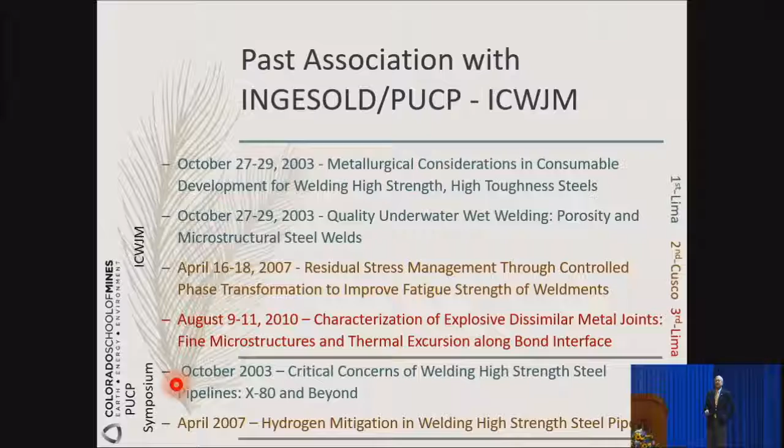I want to briefly talk about my past association with the organization of the International Conference of Welding Joining of Materials. On the right-hand side, the first one was in Lima, the second was in Cusco, the third was in Lima as well - those are 2003, 2007, and 2010. For the first two, there was a symposium to go with each one, so I was fortunate enough to be part of that program.

I want to show you a few pictures of who are the really relevant people that organized this meeting. Here you see Dr. Jorge Merztal, who was there. And in the picture, who else is there? Ernesto Indacochea. And it's international - Dr. Tom North here from University of Toronto.

So from 2010, this one was most festive. You see Professor Carlos Fosca here and Jorge Merztal here. And it was truly international because the Osaka professor Ikeuchi and Wolfgang Tillmann, and then Ernesto here again, and I think that's Carlos from Soldexa. Let's look at the next one here.

American Welding Society actually looks upon this event quite seriously, because one of the former presidents, the Big John - John Bruskotter, was here, and Professor Carlos Fosca is here again, and Jorge Merztal and Ernesto. Then finally, that was in one of the welding shows, and here Professor Rumichi, right there - I won't call you younger.

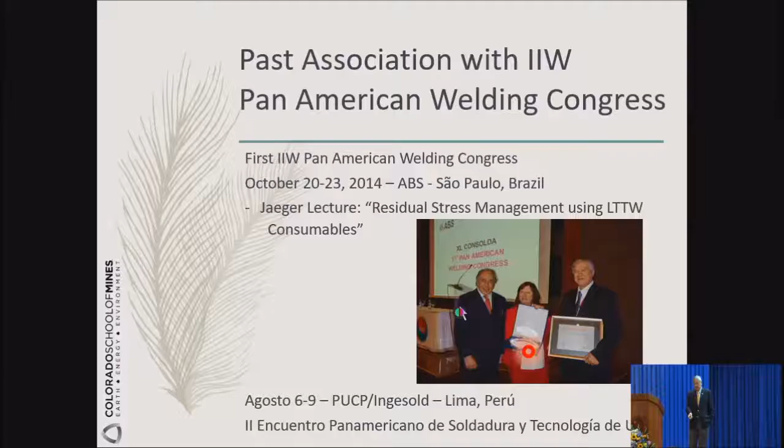Now we can go back to the actual talk for the day. We're going to talk about additive manufacturing, laser-based and electron beam-based. I know that on the program there will be one keynote talking about arc-based 3D printing as well, so we're not going to talk about that.

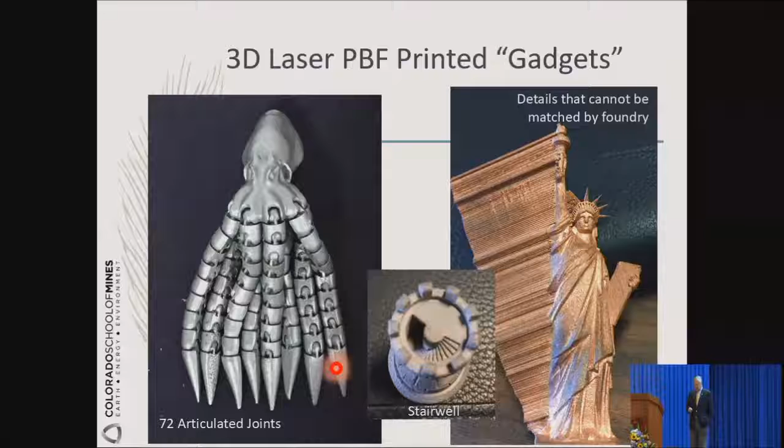If you look here at the surface, the surface condition isn't so great, okay? For each piece, you can see the surface roughness. So one of the shortcomings of 3D printing is going to be the surface - how can you produce a better surface from these 3D printed materials? Now, look at this one here, making it more like an engineering piece of material.

You have here a model engine. Now, I don't think this is an actual working engine, but yet it was printed in one piece with a freely rotating rotor. That is already an accomplishment. So let's get closer to the actual printing.

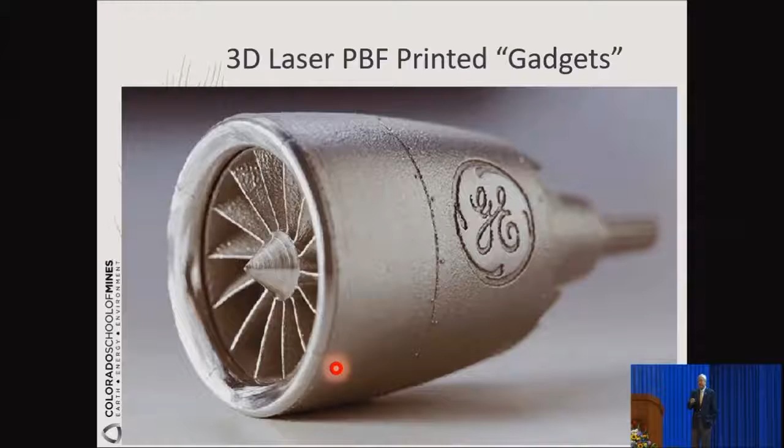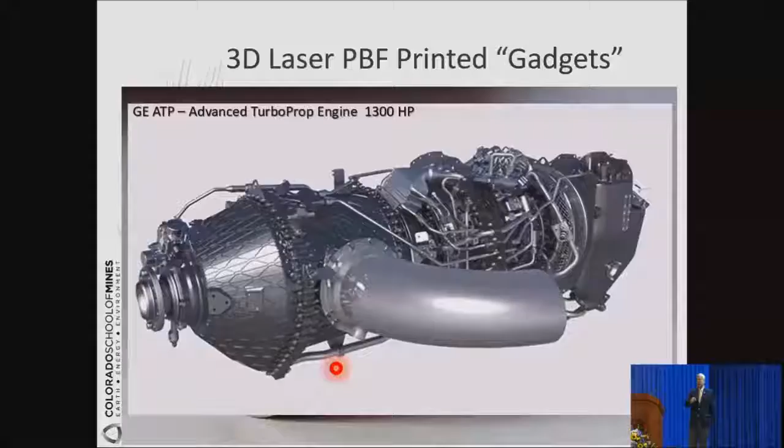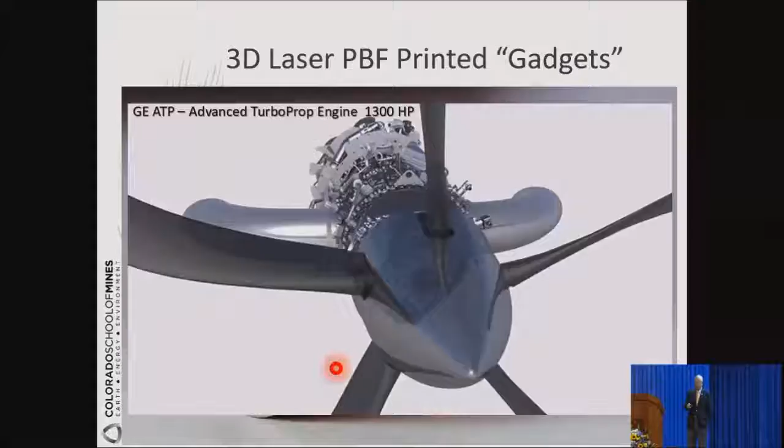GE had announced that they actually printed this piece of machinery. It's an ATP engine, and this supposedly was the first engine that was printed entirely by 3D printing. Sometimes I'm not exactly sure at what stage we are, but they claim they have built one, so let's take their word for it. But I'm going to go back to some more of the engineering components.

Here is a jet fuel nozzle, and this is actually built by 3D printing. If you were going to do this by more conventional manufacturing, this part could be anywhere between 20 to 50 parts brazed together. So just by doing the 3D printing, done by laser powder bed fusion, that is a tremendous saving. And this is a real part that is printed and in use.

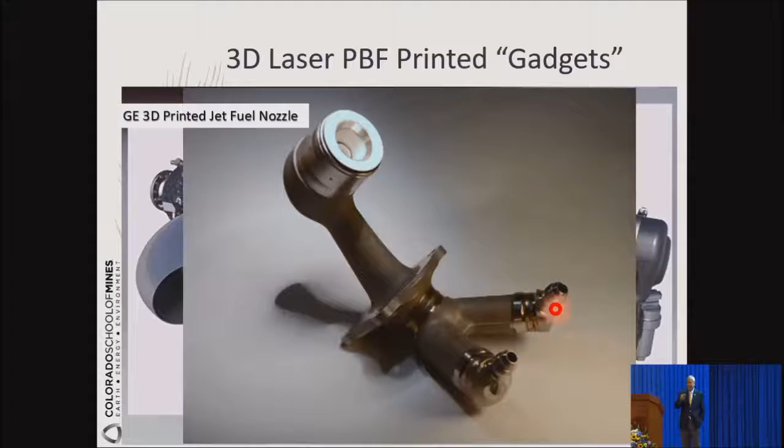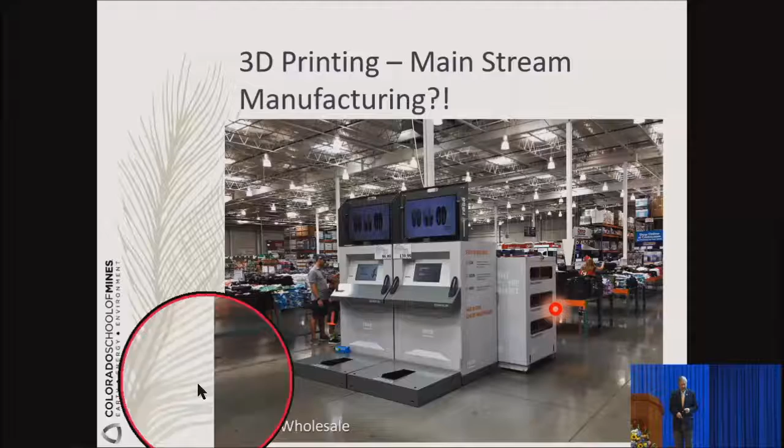Now, this one here, you won't believe how close to commodity manufacturing it is. If you look at the bottom, it says Costco Wholesale. So Costco, Sam's Club, these are wholesale retail stores. You go in there, what do I see? I see a 3D printing system. This machine here is a 3D printing machine sitting in the middle of Costco. So very quickly, I said, what is this about?

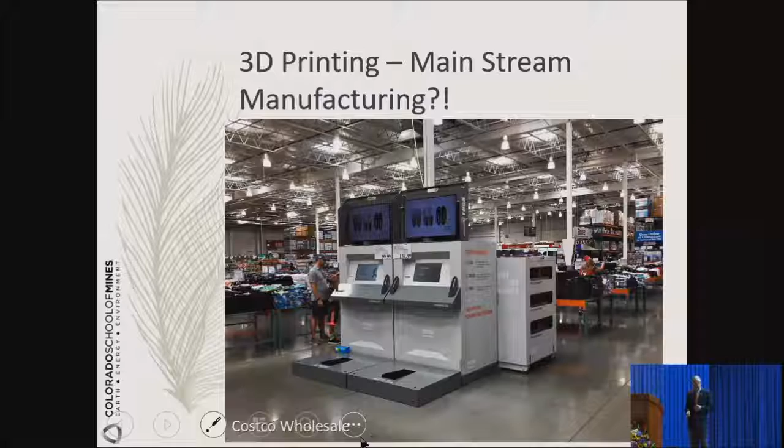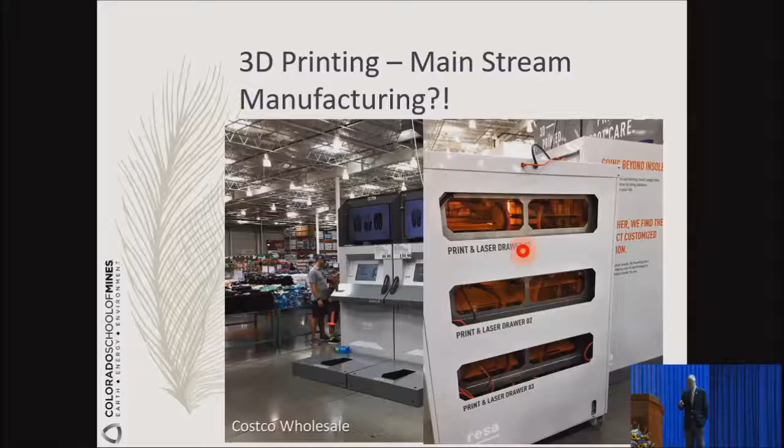So I look at this chamber here. It has print and laser drawer number 1, print and laser drawer number 2, print and laser drawer number 3. Let's go to the next slide and look at this part here, because it is actually working here. Can I get that? Oh, it won't play? Okay, well, it won't play. But it's actually printing on site.

What does it print? Insoles. Insoles for shoes, tennis shoes, running shoes. And the cost is about $130 per pair. Kind of steep, very expensive. But it is there. So, ladies and gentlemen, 3D printing is here.

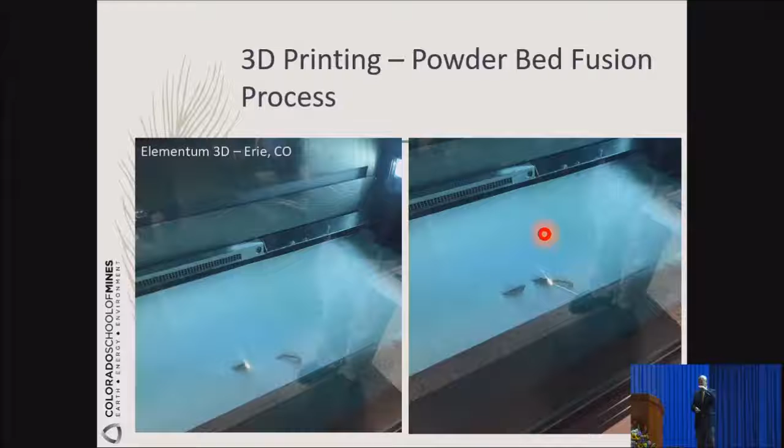By repeatedly scanning this powder, you locally melt that powder into one single part, and that builds layer by layer, however long it is. The length or height depends on your chamber capability. Most of the time today, that is the limitation, about 12, 14, 16 inches tall. So a part can have that volume.

So what have we done that I wanted to talk to you about regarding 3D printing? We have been looking at electron beam freeform fabrication, which is the electron beam process to build 3D parts. Laser powder bed fusion, the PBF process, and also laser direct energy deposition. We have actually worked in this field in all three.

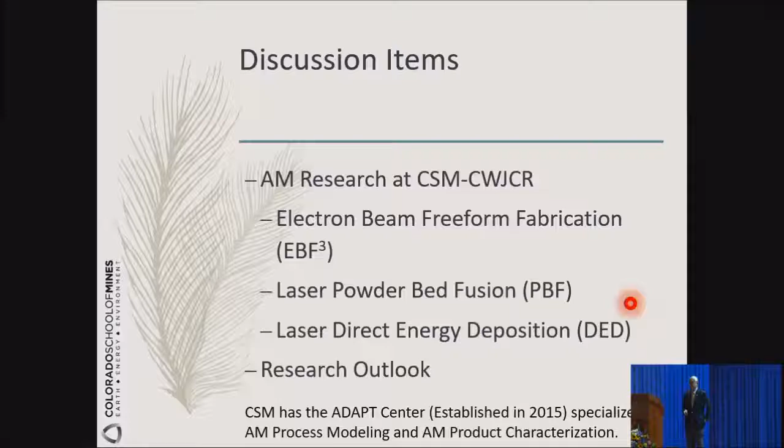CSM, Colorado School of Mines, also has another entity called the ADAPT Center. The ADAPT Center and the Welding Center are parallel. ADAPT works only with 3D manufacturing, but they are far more into process modeling, mathematical models for the process and output characteristics, and also product characterization, while we do most of the material characterization.

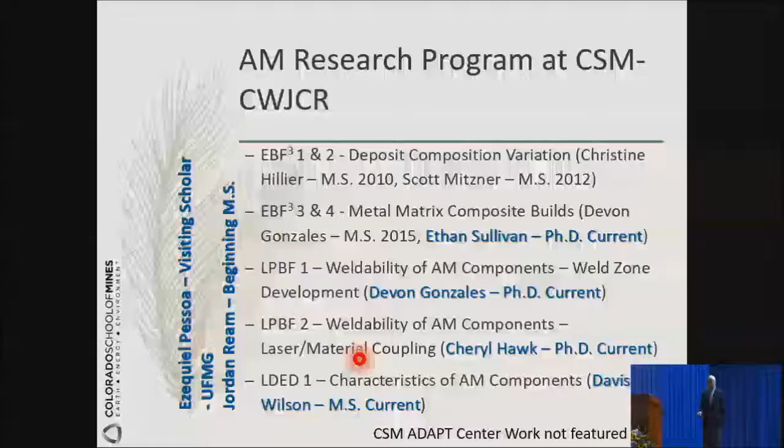So here's a little bit of the history of what we have done. We started about in 2008, and here are some of the students, the blue ones are the current ones. We have 6 graduate students working on it and 1 visiting professor collaborating in this effort. So the first part I'm going to talk about is the electron beam freeform fabrication.

We have experience in aluminum alloys, titanium alloys, and composite materials, aluminum silicon carbide alloys.

And the last group is in situ composite. You'll see in a minute why we put so much emphasis on the in situ composite.

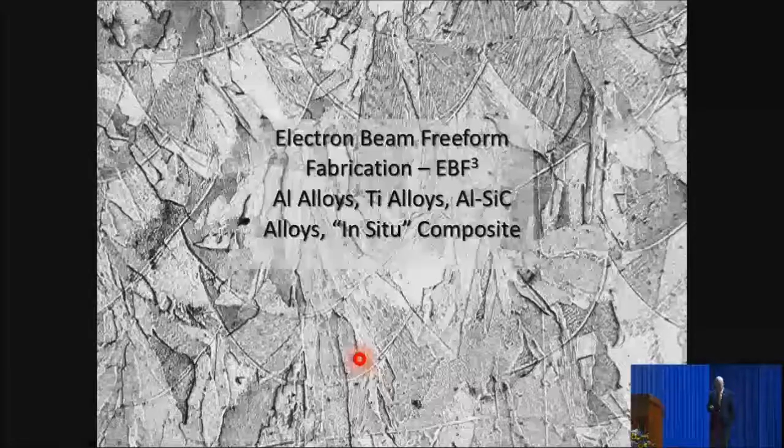So this is one of the questions that a friend asked me. He said, why do you want to do 3D? If you have a part that has been rolled or forged and heat treated, you will never be able to build a part out of 3D that is comparable. I said, well, you can have this part built 3D and then HIP it, hot isostatic pressing, for example, and then heat treat it, you will develop the property.

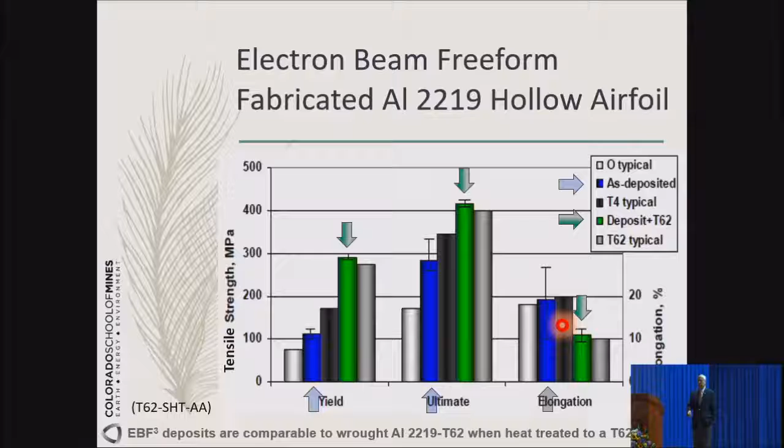So it is possible to do 3D printing followed by several post-processing methodologies.

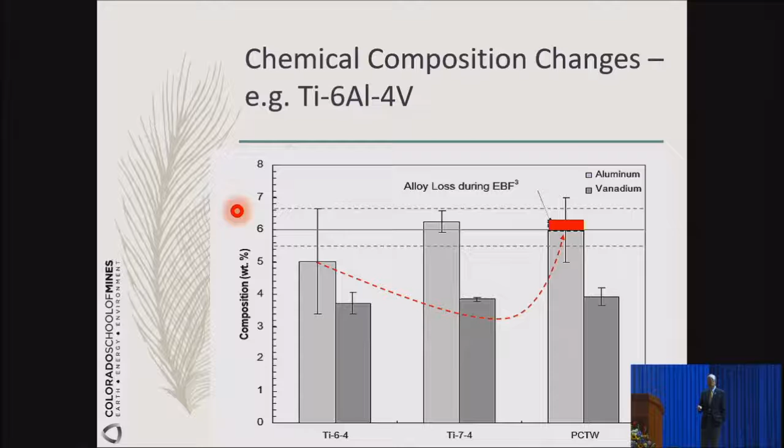So what we have done was to use a powder core wire. You put your correction of the chemical composition into this powder core. And with that, you see here, your alloy composition falls back to the original 6% of the Ti-6-4. So it is possible to do that.

So here I will compare for you two different processes. One using what we call the monolithic Ti-6-4, the other one the powder core Ti-6-4, so that you see the differences between them. Look at this first one here - this is made by a monolithic wire, which means a solid wire deposition using electron beam. So the electron beam hits the wire and then deposits onto your substrate.

On this diagram here, you have 12 layers building on top of each other. On the right-hand side here, it's not that important, but it will show you some of the metallurgical phenomenon, such as banding and the microstructure. The important thing is that you see the tremendous amount of epitaxial growth - the grains continue from layer to layer, from layer to layer. But no defects, no visible defects.

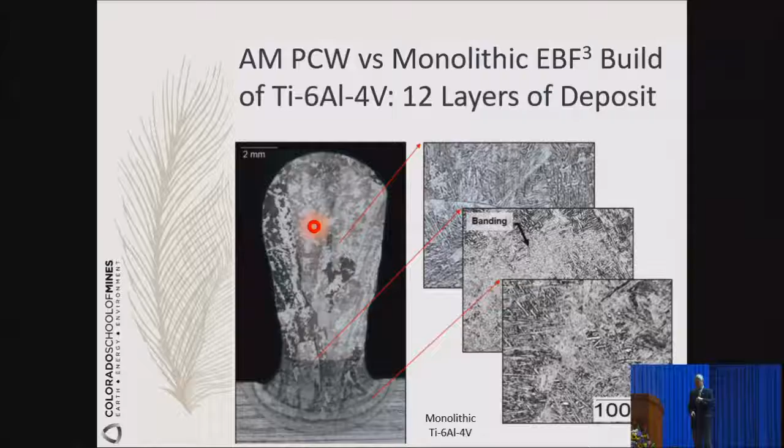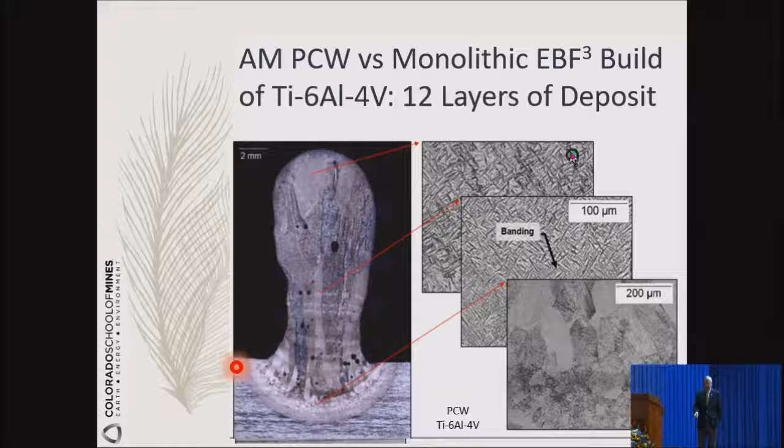If we switch that to the powder core to compensate for the composition loss, what do you see here? You see the presence of pores. Because of the inherent properties of the powder that you use, when you deposit, now you generate this porosity. What are these properties, these characteristics? Maybe oxygen, maybe nitrogen. So some of these oxidation products, they decompose and then release. So now you have all this. But the characteristic of epitaxial growth continues.

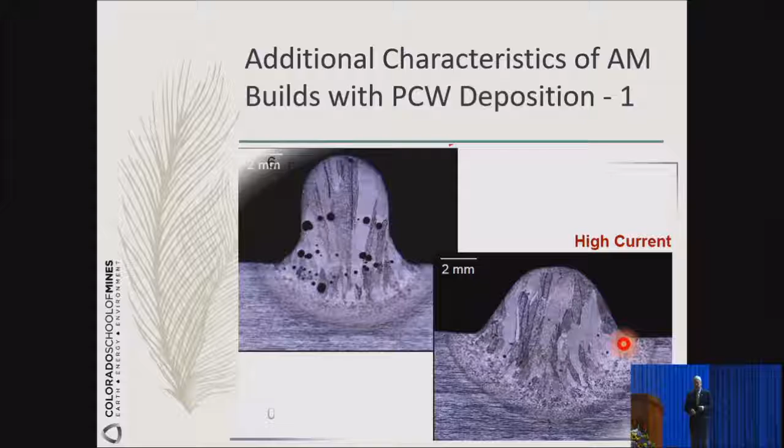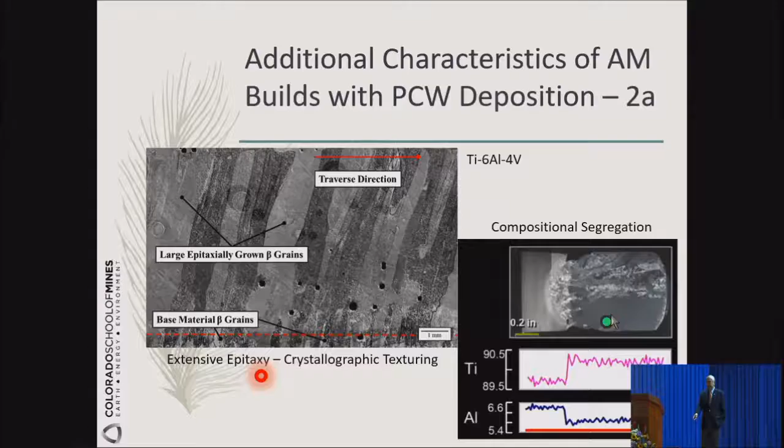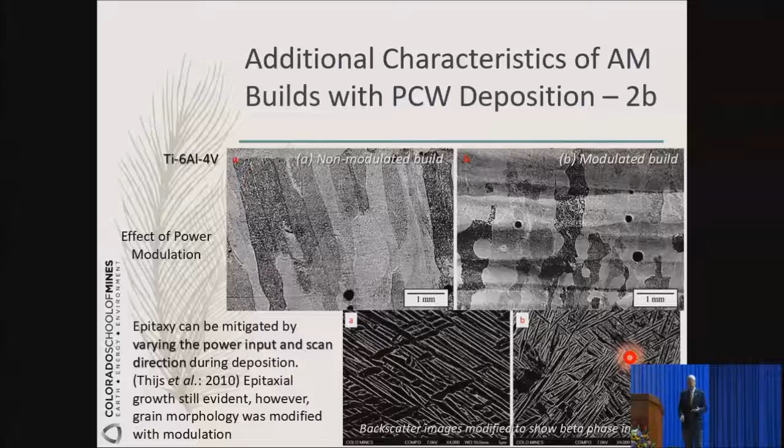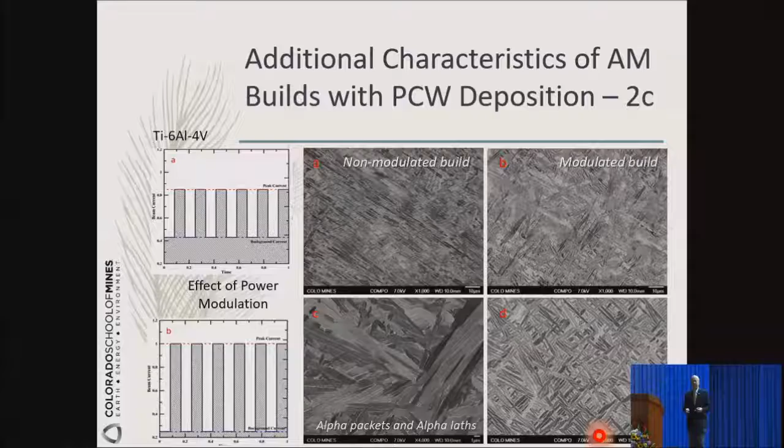Again, I'm showing you that it is possible to change the macrostructure as well as the microstructure.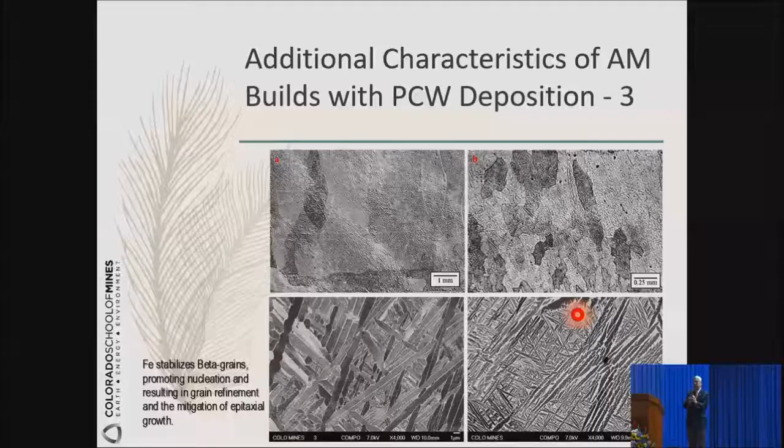So it is possible then to combine between metallurgical as well as just process control, okay?

All right, so this is the more hot topic these days, is that we want to use composite material for a number of reasons, and these are the good things. You can see the UTS increase by going to a composite material, and you can see the shear strength increase by going to a composite metal.

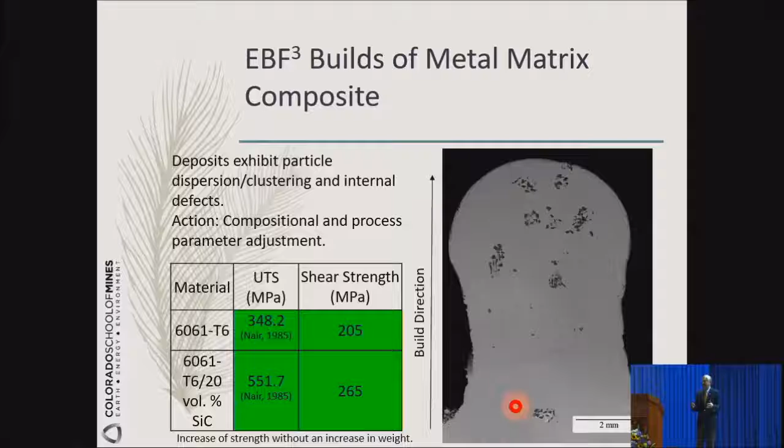So on the right-hand side here, you see a composite build. What happens there? The particulates do not disperse. That's the problem, they form clusters. And when you have clusters, you have just cut down on the effectiveness of the composite material. So then our job was saying, how do we do that?

There's some problems, some defects that go with it as well, is that if you put silicon carbide into aluminum alloy, the silicon carbide going through that arc source or going through the electron beam source or laser source, they will decompose, and the carbon will be picked up by aluminum as aluminum 4, carbon 3. And those are bad for the mechanical properties, crack opening, and so on.

In this case, you see on the left-hand side, silicon carbide dispersed in aluminum. On the other hand, on the right-hand side, you also run the possibility of hot cracking as well.

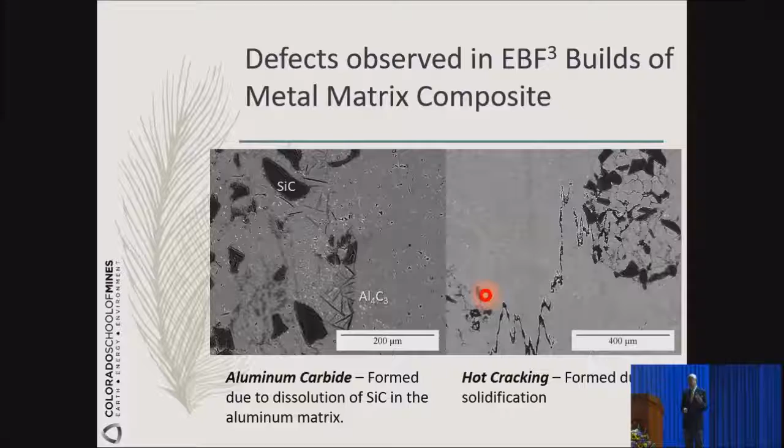So then we thought, okay, what we can do is coat each one of those fibers. So silicon carbide, you coat it. Here, if you look at it, we tried titanium coating, magnesium coating, nickel coating, copper coating. We learned a lot, is that too thick a coating does not work. You know why? Because too thick a coating, that particulate will behave like a piece of metal. It won't behave like a ceramic particle. So thin coating is what works, okay?

And so here, thin nickel coating and thin copper coated particles work better. It changes the distribution of the particle, allowing a little bit better dispersion. So there's a lot of modeling work that needs to be done in that part.

And then the last part here is in situ particle formation. Instead of adding those particles in there, why don't we let those silicon carbide particles form in situ in the system? So we're working with a company who has the expertise of exothermic reactions in the melt pool to form these particles, because formation in situ will avoid this wetting and distribution based on the flow of the material of the pool.

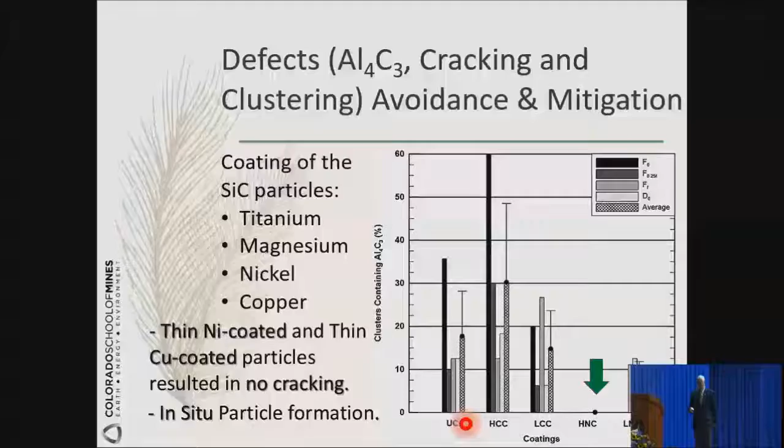All right, so let's move on to talk about the powder bed fusion. Up to this point, we were doing the electron beam freeform. So powder bed fusion, we have two pieces of work, one mainly on the 17-4 PH as a martensitic stainless steel, precipitation hardened, and then the 304 stainless steel.

So we had a few questions. What we wanted to know is, can we weld these AM components? People think, okay, I'll build these parts. But by building these parts, you still have the need, you may have the need of attaching several of these components together into a larger assembly. That's our focus there, is to see does the AM part weld just like a wrought material? And we found that it does not, okay?

And then the rest of it is more metallurgical. What does the AM microstructure, how does it affect the welding behavior? What about the texture that everybody talks about?

What about the residual stresses and so on?

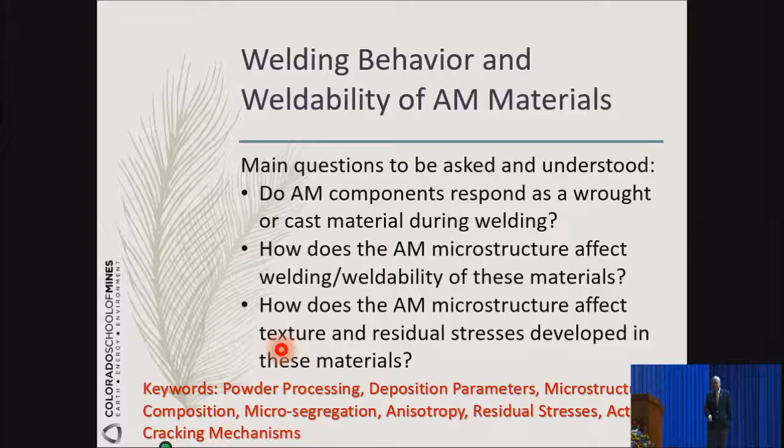There's a whole list of keywords you should be focused on: powder processing itself, deposition parameters, microstructure, composition, microsegregation, anisotropy, residual stresses, and more. All those are just on your platter. It's really a banquet for materials engineers, metallurgical engineers, manufacturing engineers. Really great area to be studying.

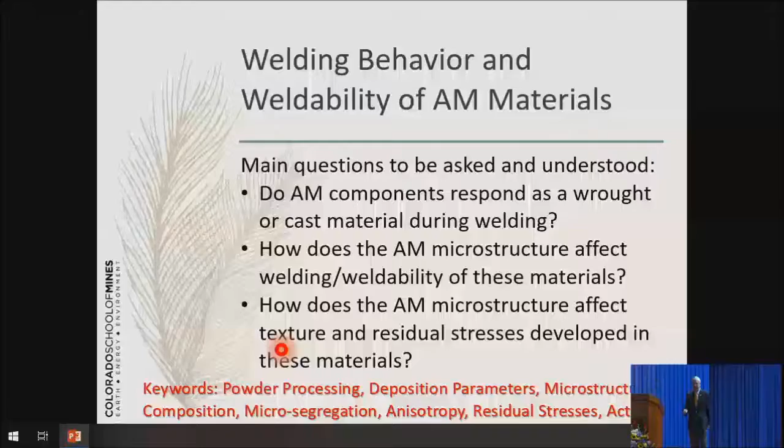Okay, so we look at the 17-4 first. If you focus on the right-hand side here, the dashed lines mean the layers of deposit, and they were all built from the bottom up. The dark line is the weld. We welded it here going this way, and then the other one we welded horizontally, meaning parallel to the build layer. One is transverse to the build layer, one is parallel to the build layer. So that's number one.

You wanted to see how the deposition scheme and the welding scheme affect the property.

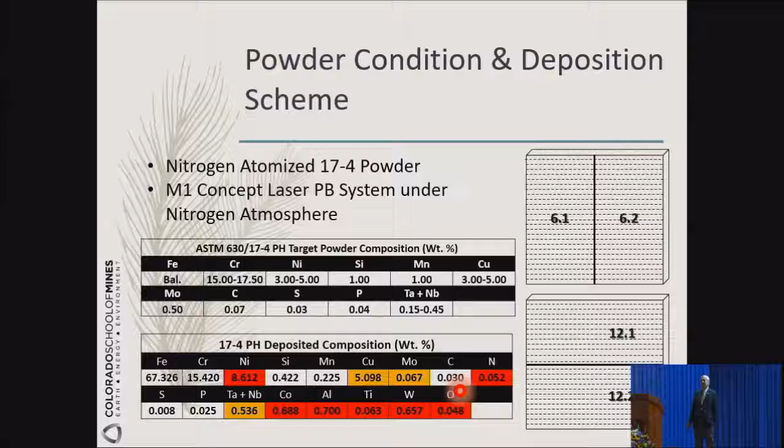The other thing is to look at the base target composition of 17-4 versus the deposited composition. Right away you see those red boxes showing the different composition you get. The nickel composition particularly is different, going from the original nominal composition of 3 to 5 up to about 8.6%. Then the nitrogen composition is much higher than expected, and oxygen at 0.048% is also too high compared to its composition.

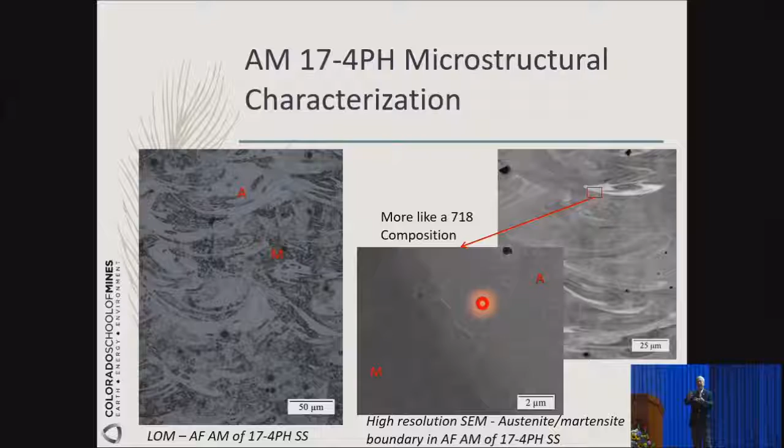Take a look at the right-hand side here. We took this little swirl and did an analysis. You look at it almost like a composite material, because on one side you have austenite, on the other side you have martensite. This side is closer to the 17-4, but this side is more like nickel 718. So what happened there? Now you literally have repeating patterns of this swirl with different composition.

Then a bit of TEM work here, and also STEM work. You notice the nickel composition goes up, and it reads like 718.

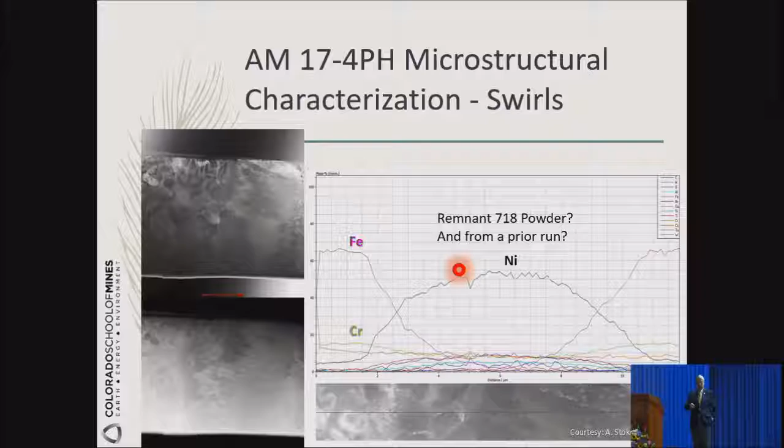So now that begins to bring in another question: did the manufacturer screw up in the sense that they mixed powder? Was it a totally clean system before they started building the 17-4? Those are the questions we have. If it were only due to the welding, the deposition itself partitioning and distributing like the 718, we have a major problem getting it back to a more uniform composition. If it were more of an operation failure, then it's just a matter of cleaning the system. But that remains a problem to be resolved in the industry.

As a consequence of this change in composition, you actually change the microstructure and solidification as well. The expected composition from the substrate, calculated according to the WRC index, positions here as a ferrite solidification mode.

But when you have a deposit, these two deposits sit up here - it may be a bit too light for you to see, but one is closer to austenite solidification, the other is AF, meaning austenite primary solidification followed by ferrite solidification. If you plot this on the diagram, they represent these positions here.

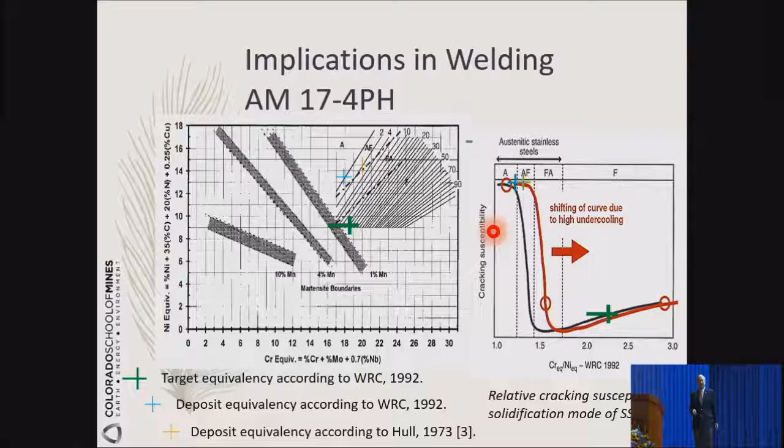Now, if you increase the cooling rate, it shifts further to the right-hand side. Cooling rate is important in 3D printing because each one of those deposits is so small relative to the substrate. So there's a lot of metallurgical engineering work there.

Another thing we want to point out is that the material you're welding also exhibits a great deal of differences as well.

When you weld on a wrought piece of 304 stainless steel, and you weld on a 304 AM'd material, just the metallography preparation will tell you that something different has happened. The heat-affected zone size is different, the microstructure is different. So is it possible that the thermal conductivity, heat capacity, and heat flow behavior have changed? All those questions remain to be answered, and a lot of thermal analysis work can be done here.

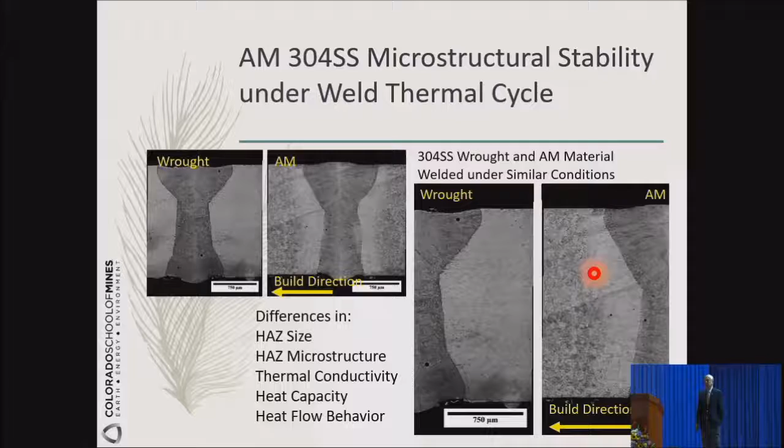Enlarging the left-hand side diagrams, you have the wrought material. You can hardly distinguish the heat-affected zone behavior or microstructure. But when you look at the AM material, look at how clearly the microstructure developed. Those are other things we need to be careful about.

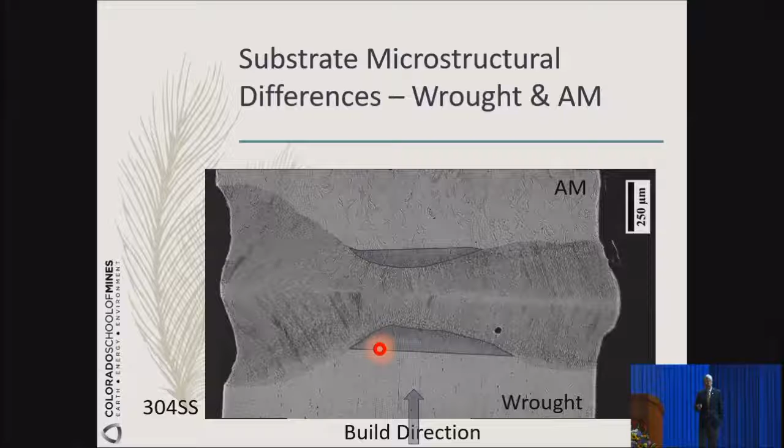Another example is looking at the AM to wrought material build. This is a dissimilar metal joint, so to speak. Look at this zone here. We highlighted this boundary, but the coloration is as shown. One side is greater than the other, so the heat flow is not balanced. If you look at the weld morphology, we copied the bottom side and superimposed it here.

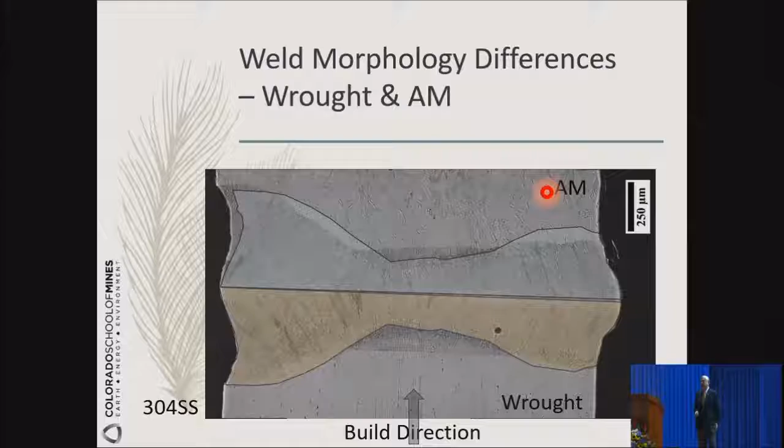Can you see that there's a region here that is not covered? So the weld pool that forms—I call it a weld pool, but it's the deposit pool—is actually different in shape. Again, this is a reminder that there are fundamental differences between the wrought material and the AM material.

Now look at the AM texture using electron backscatter diffraction, and epitaxy is there. But epitaxy in these 304 cases doesn't go through multiple layers like in the titanium case. In this case, most of them go through maybe a couple of layers.

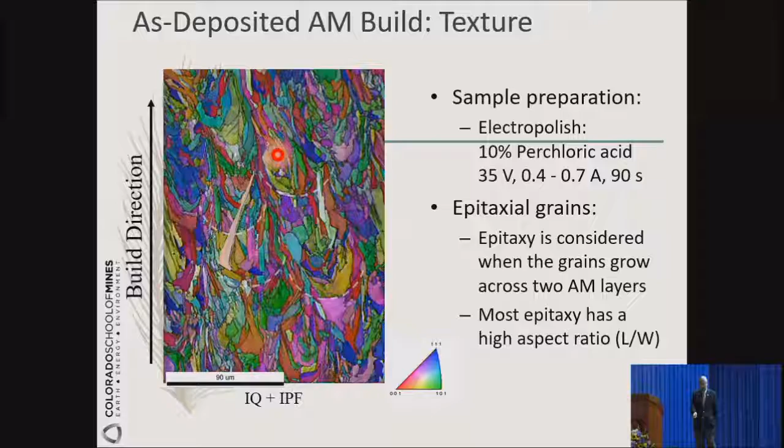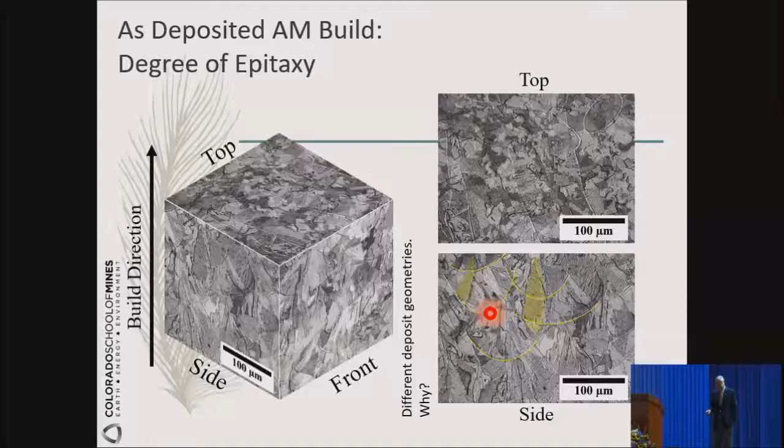Okay, so here you see the epitaxial growth phenomenon. Another difference: look at the wrought product, welding on the wrought product versus welding on the AM product. The fusion line is how uniform on the left-hand side, and how rough on the right-hand side. So AM does have this problem—a problem in the sense that it exhibits this heterogeneity.

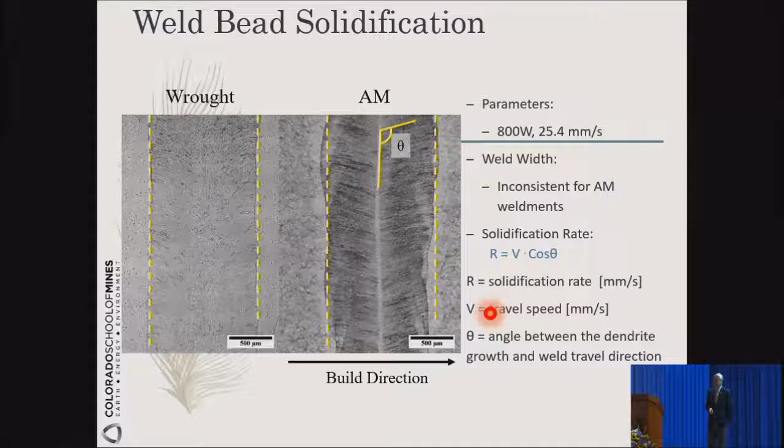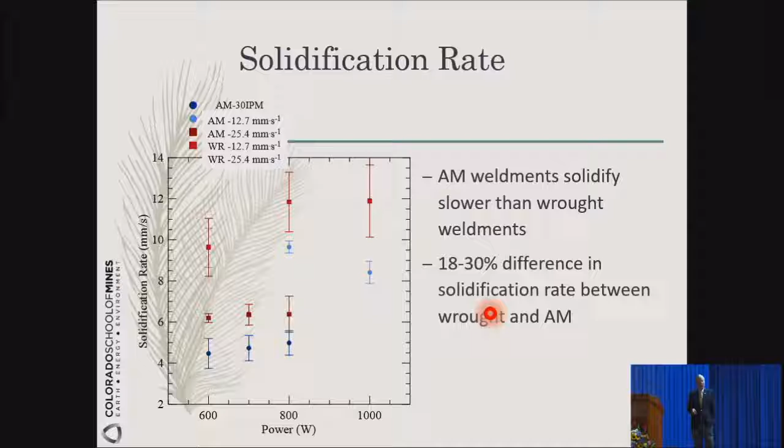So you can calculate the solidification rate now. If you calculate the solidification rate, you'll find that AM actually has a lower solidification rate than the wrought material. Quite interestingly, why should that happen? That's again the question we're pursuing.

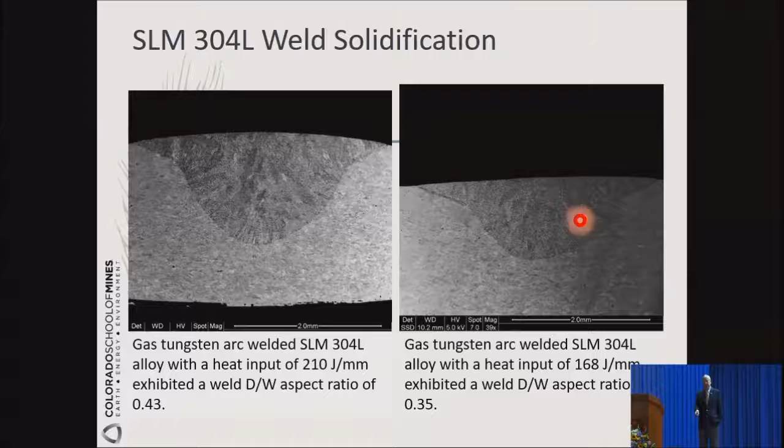Okay, all right, so look at this. These are gas tungsten arc welding over the selective laser melting, which is powder bed fusion in this case. The morphology is different by changing the heat input as well, with the aspect ratio of 0.43 on the left and 0.35 on the right.

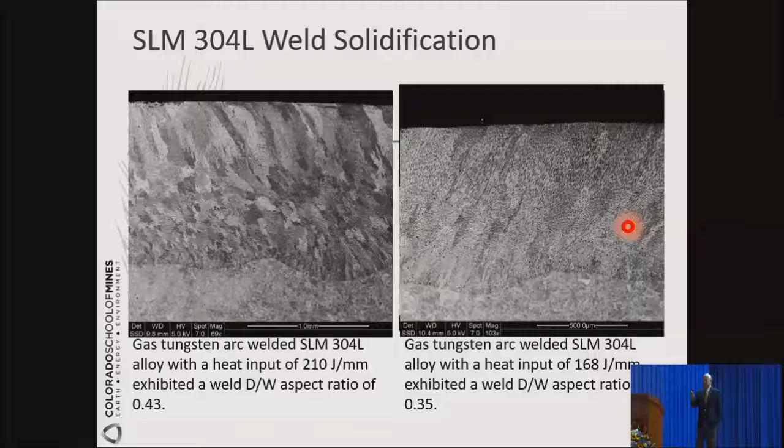And if you look at the longitudinal transverse cross section, look at the bottom of the bead—it has a lot more of this fluctuation. It's not quite like the laser spikes or electron beam spikes in welding, but it does show that difference.

All right, so it seems to me that I'm giving you far more questions than answers, okay? But that's okay, that's how it is.

So this part here, we're looking at directed energy deposition. Powder bed fusion and directed energy deposition are different. In one, a powder is laid down and then you scan your laser. In this case, you have your laser and different sources of powder feed into the laser beam and then deposit. So we wanted to understand, would there be differences between powder bed fusion and directed energy deposition?

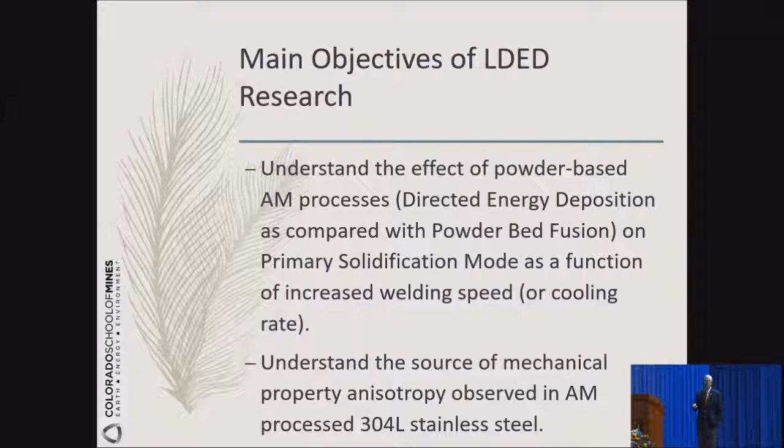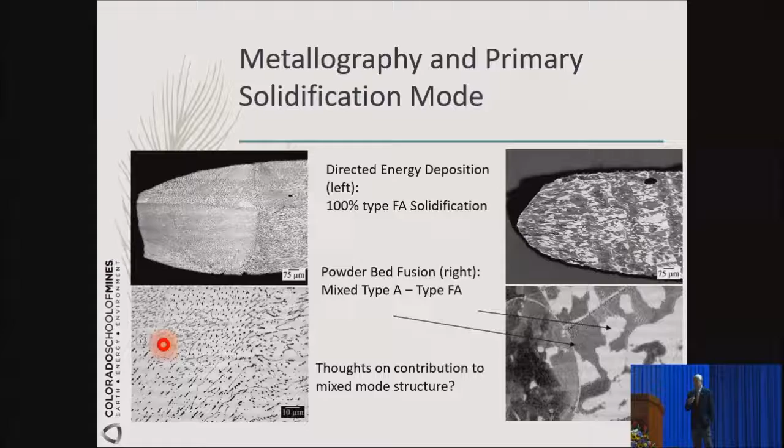And the answer is that there were differences, in fact, in terms of solidification and anisotropy and so on. If you look at it, on the left-hand side is directed energy deposition, where the powder is fed directly into the weld. Just look at the microstructure here - this is totally different from the right-hand side, which was powder bed fusion. On the right-hand side, enlarging it, you see a mixture of solidification modes. On the left-hand side, you have almost a cellular structure, that is your ferrite-austenite solidification. So there is a difference, but why should there be a difference?

That's the whole question that we're pursuing as well. Another thing that people look at a lot about anisotropy is the mechanical properties.

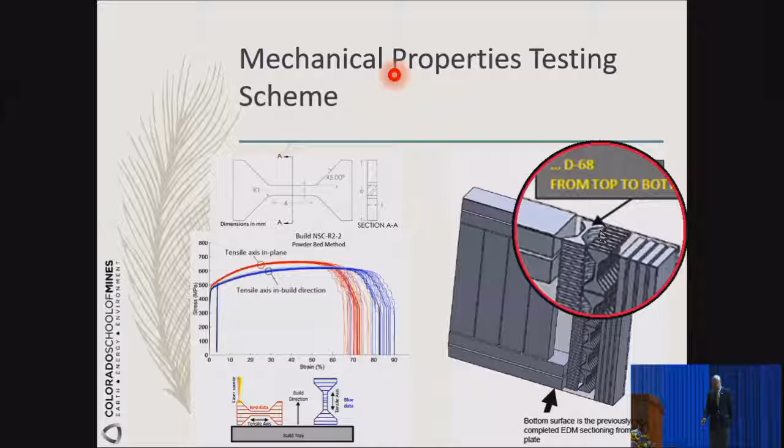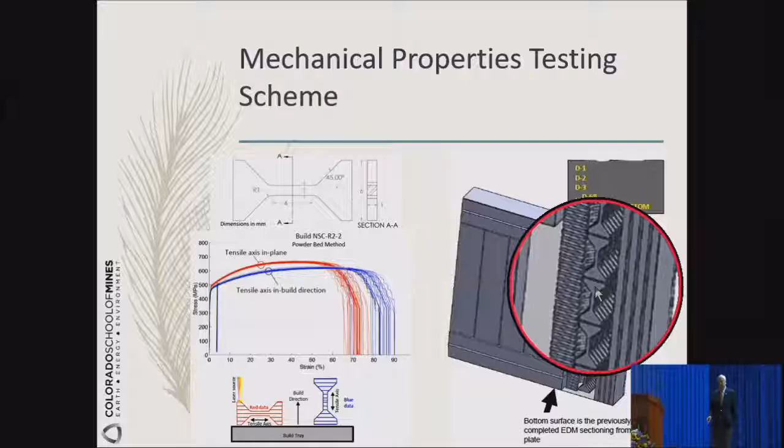You see that they are different, they exhibit different properties. So the blue lines here are in the build direction, and the red lines are transverse, orthogonal to the build direction. And invariably, the red lines have higher strength but lesser ductility, while the blue lines have lower strength but higher ductility.

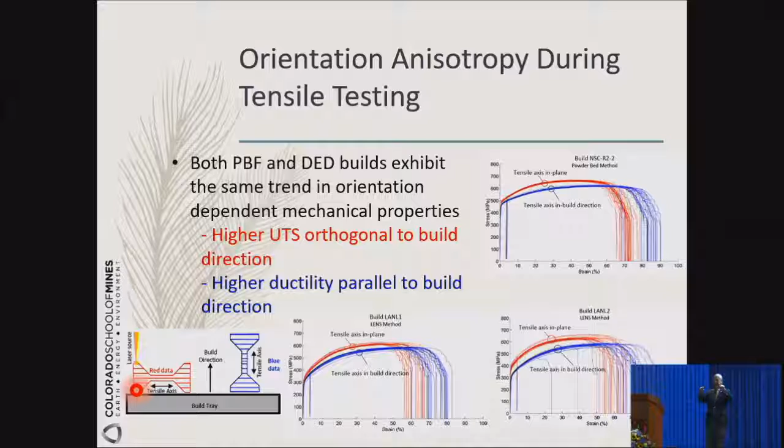So what happens there is the following: the blue lines are built this way, the samples are cut this way, and the red lines are cut this way. If you look at this, it gives you some impression that this could be considered as a composite material. Because on the left-hand side, you have the fibers, so to speak, built this way, and you're trying to pull it in this direction. So no wonder the properties are different.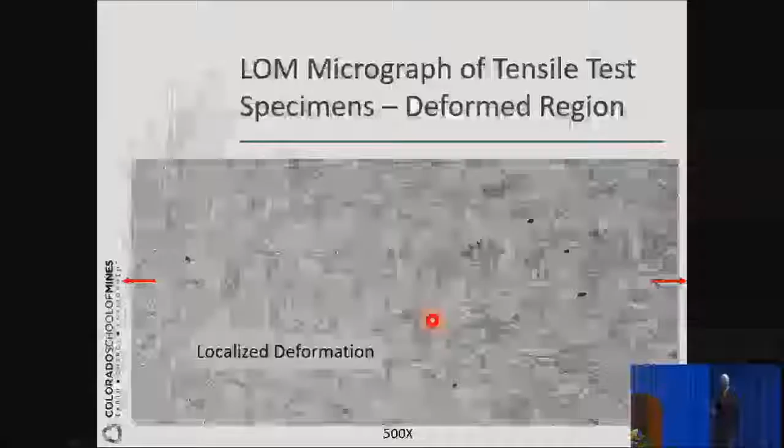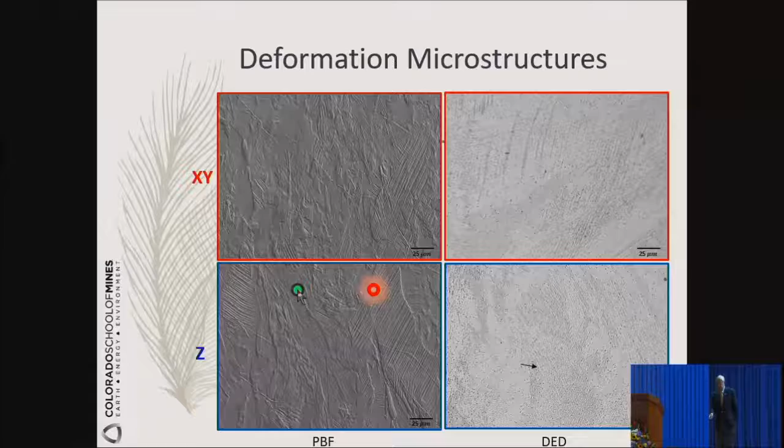So taking a look at the light micrographs here, the Z and XY represent different views of the different materials. You see here, there are some features that could be identified as maybe twinning, the result of twinning products, which is not as visible in the DED. On the left-hand side is powder bed fusion, on the right-hand side is direct energy deposition.

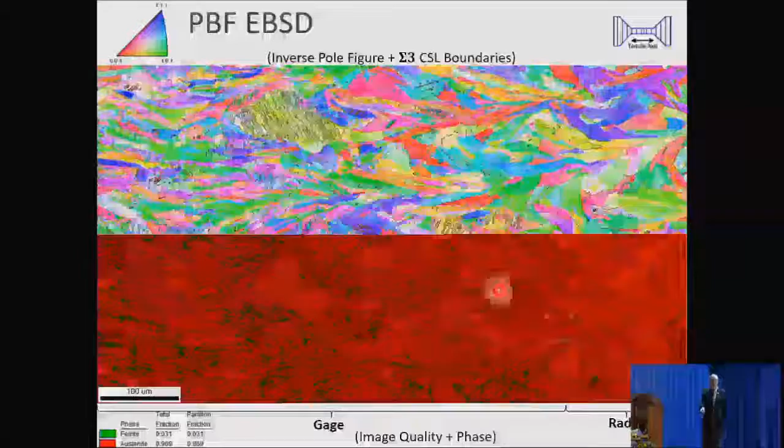All right, so then you look at the EBSD, the image quality mapping, and the phase map - you see two different phases, the austenite and the ferrite, even though the ferrite identified here is very likely that of martensite, for example. This is the powder bed fusion. If you look at the next one, it's the DED, direct energy deposition. You see somewhat similar results, with different amounts of martensite and austenite and so on.

But the X-ray diffraction shows you the best examples. Look here, there are three different spots where we did the X-ray: one is from the grip, one is from the uniform elongation side, and one is from the post-uniform, that is the non-uniform elongation. So let's focus only on the blue ones - if you look at the blue one here, across the DED, direct energy deposition, or the powder bed fusion, they all show the presence of martensite.

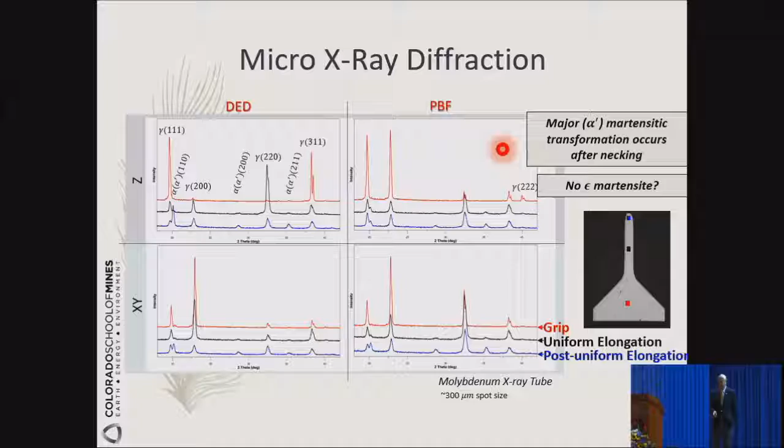So actually, martensite forms together with the presence of austenite. So that makes the explanation of the properties.

All right, so what is it that we look at in the future? From this point on, what are we looking at? This represents only our own views and what we are focusing on.

Custom design new material systems of deposition, the core and sheath material, metals and composites, and in situ composite development. We see that as an opportunity for really creating a different set of properties.

Customized powder design and processing. I really think that we need even better properties and processes for the powder properties - really clean powder with little oxygen, little nitrogen, in the composition that you do. Today your powder may not be guaranteed, so atomization and all that is still less than desirable.

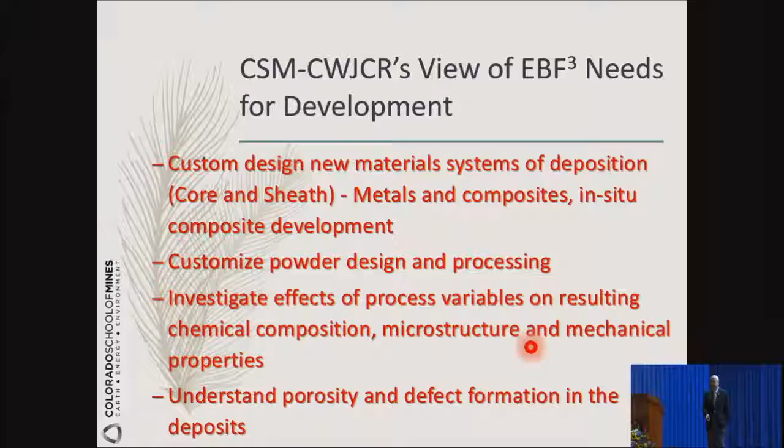Investigate effects of process variables on resulting chemical composition, microstructure, mechanical properties, and understand the porosity and defect formation in the deposits. For AM weldability, understand weld zone and heat affected zone formation for AM materials as a function of physical properties. Relate microsegregation to AM weldability. Characterize residual stress development in welded AM material.

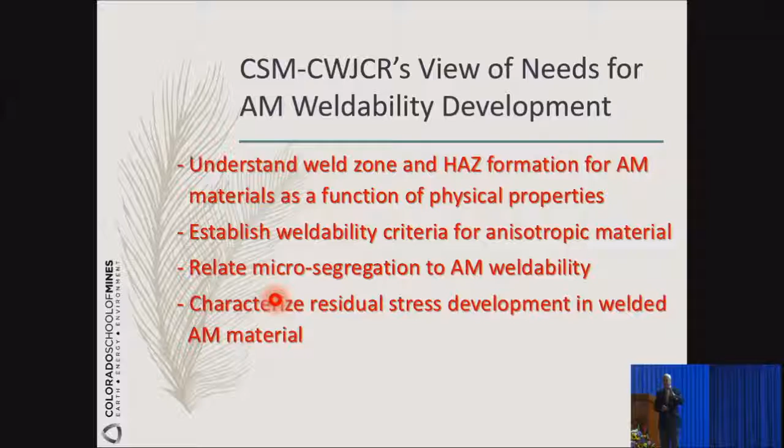I think it is there because during the manufacturing, as you deposit the powders, if you don't manage it correctly, the deposited layers simply peel off to that extent. So that's kind of serious in that matter.

Model the cracking mechanisms in AM materials, particularly in aluminum alloy systems used more in aerospace applications, where they can become critical. Characterize mechanisms in the AM weld, so additive manufacturing 3D printed. And then the next one is 3D printed to wrought material, because many times you have to attach it to a wrought part - develop dissimilar AM and AM-wrought welds, so different material systems.

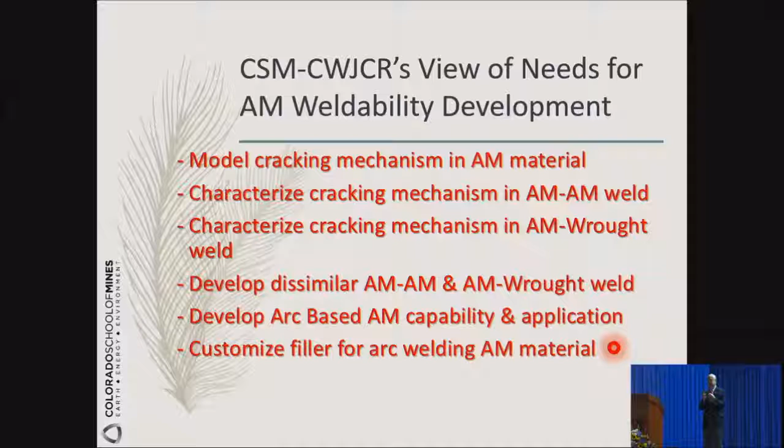And then there is going to be a talk on arc-based AM. So develop more of the arc-based AM capability and application. Customized filler for arc welding AM material. At our school, we typically have expertise, a niche, in consumable manufacturing, so we think we can apply our knowledge there.

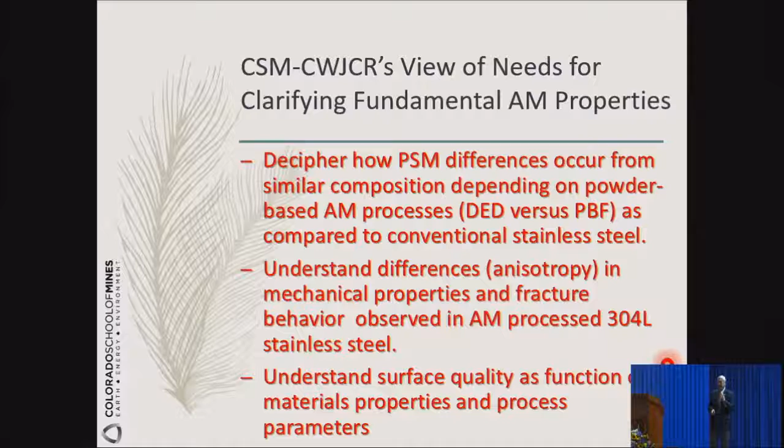And then the last one, I think the final one, is surface quality. We talked about all those, but we did not talk about surface quality much. The surface quality many times can be - I won't call it an Achilles heel - but it is going to be one of the weaknesses there.

So what is it that we have acquired at our place? We are going to be getting a system, the arc-based additive/subtractive manufacturing. What this is, is that you build one layer, you machine one layer, you build one layer, you machine one layer. There are several advantages to doing that. First of all, extremely good surface finish. Second is that you take out the part and manage the residual stress as well.

So that is going to be a joint effort, the CSM Adapt and the CWJCR, with a company called DMS and another company called BMA. And the equipment is going to be placed in my laboratory. We're also going to place a KUKA robot, which would be a central piece for the AM cell, to be placed in our center.